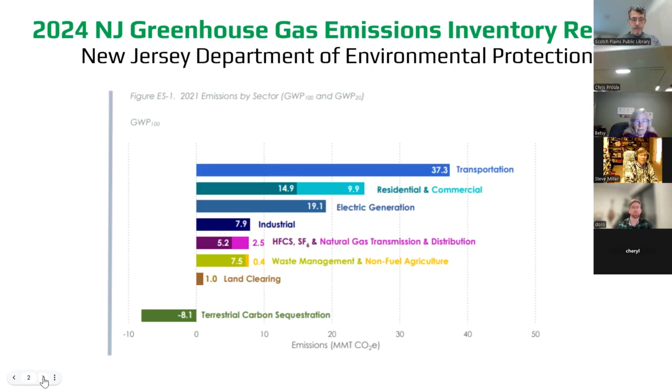Next slide. At any rate, buildings don't change that significantly year by year, and they make up a significant portion of emissions, as you can see. Which is why it's important for us to focus on this.

It's also a complex topic, especially for homeowners or any small business, to figure out what they need to do to reduce emissions. It's also important to work with the contractor out there to bring them up to speed. Contractors will oftentimes do things the way they know because it's business, time, money, etc. But there's new ways coming along all the time, and they need sources of information and references to do this in the most modern way.

So building electrification can really reduce emissions, and the nice thing about electrification is you can also add solar, and then you literally can run your house for really no external source of electricity, I'll put that in quotes because there's different ways to frame that.

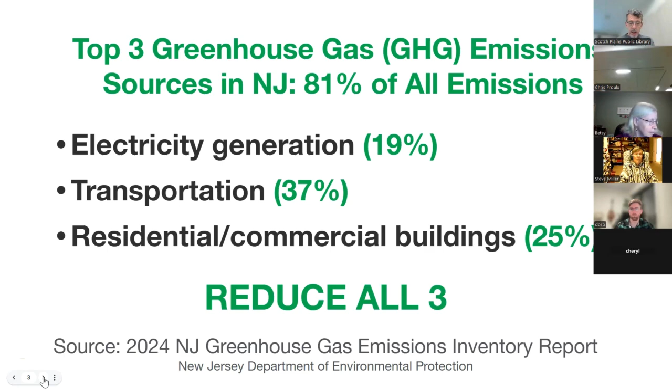But tonight, we'll show you how consumers, as well as the state as a whole, can benefit from having this kind of advice. We have a case study with a person we've worked with recently, Karen, and this will help you understand the process. Okay, next slide, and I think Betsy, you're next.

Is that right? Yep, I'm next. So, hi, I'm Betsy. Just for your information, we do have a Substack site, a website, so that you can get the information. You can sign up for coaching if you'd like, and just contact us after this presentation's over.

So we want to show you what does a coaching session look like, what kinds of things could you expect to do? We try very hard to answer the questions that you have. We don't have a standard procedure. And we want to caution you, without a good plan where you think about things ahead of time, you can't expect good results. Next slide, please.

So even before talking to us individually, a really good thing to do is take a look at Rewiring America's personal electrification planner, and you can see the URL there on the slide. It's a really great online tool, it helps you think through your situation, gives you a lot of information, and then you can go back and forth and fool around with it. Then when you're ready, if you want more personalized questions answered, you can contact us. So the first part is to go to the tool and make a plan. Next slide.

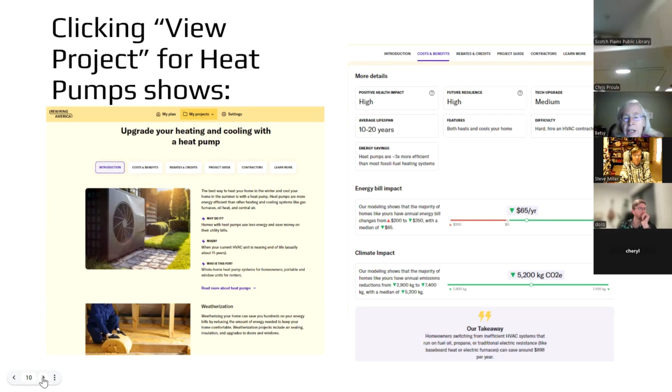Underneath the introduction, on the left-hand side of the page, it tells you what a heat pump means, and then it gives you the cost and benefits on the right-hand side. It's got a high positive health impact, it's going to last 10 to 20 years, and it's fairly hard to do—you really are going to have to hire an HVAC contractor. Then it tells you about your energy bill impact.

Now we're continuing to click along those tabs at the top, and we're at rebates and credits. I want to emphasize that rebates and credits come from 3 different sources: there are federal rebates, state rebates, and utility rebates, although there may be local rebates in some cases too. So there are a lot of different places to look for financing.

Rewiring America knows about the federal rebates, and it tries to keep up with state and utility rebates, but you might have to look for those yourself as well. You can see there's quite a bit of money available, but if you look on the right-hand side, the costs show this is a rather expensive project, as you'd expect if you were replacing your gas furnace. It's also recommended that if you haven't already weatherized your house, you should do that too, and it gives you information about that.

And if you keep clicking along the top of that tab line, we get to the project guide, a set of steps you'd take to actually put a heat pump in your home. You could click on any of those to get information, but for this presentation I clicked on vet your contractor candidates.

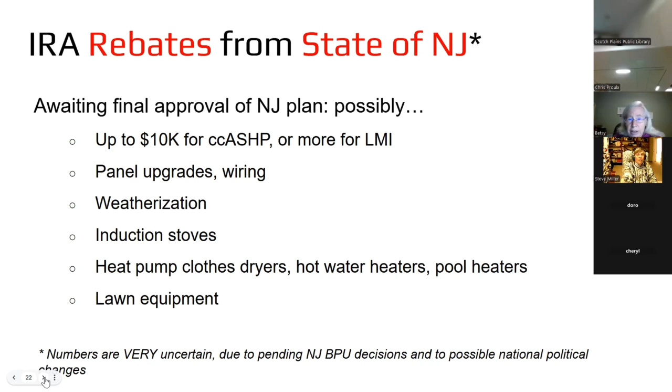We're awaiting the IRA rebates from the state of New Jersey, and here are some notes as to what we think will be proposed and what we think will be law: probably up to $10,000 of a rebate for cold climate air source heat pumps, and possibly more if you're in the low to moderate income bracket. There will also be rebates for panel upgrades and wiring changes, for weatherization, for induction stoves, for heat pump clothes dryers, hot water heaters and pool heaters, and for lawn equipment.

Your utility also offers rebates and loans. One of the nicest things is a zero interest loan. The philosophy is that you can pay for the equipment via the energy savings that you achieve each month, so that's a really nice way to finance things. The utilities also have other kinds of rebates, and they often have sales on equipment like smart thermostats, LEDs, etc.

Another interesting website is EnergyStar.gov, and you can find rebates through there too for particular kinds of equipment. Here's one where I just looked for heat pumps, but you could look for clothes dryers or pool heaters or something.

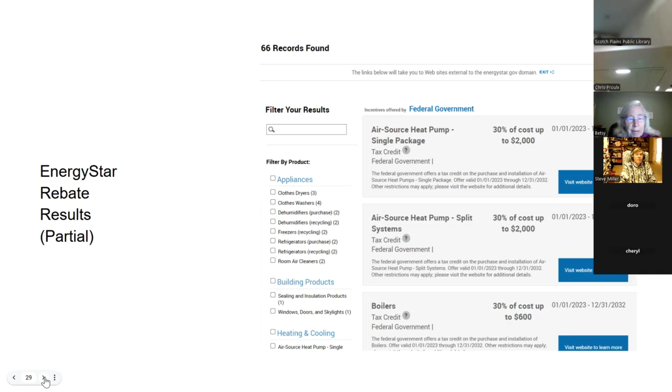Finding an HVAC contractor. We mentioned this a little bit already, I don't want to get too much into it since I talked about most of it. This is where we can help you a lot in trying to find local people.

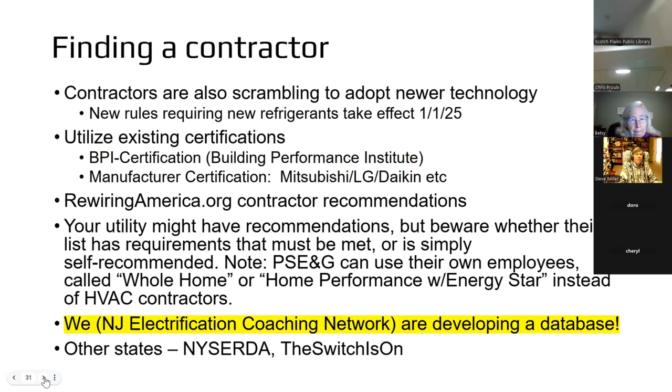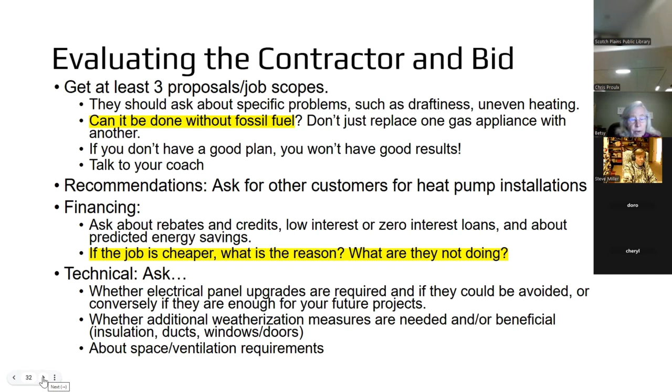Where we can also help you is in evaluating the contractor and the bid. Get at least 3 proposals. Ask them, can you do it without fossil fuel? Many contractors are just proposing what they know, not necessarily the newest technology that's out there. You can also ask your contractors, if their job is cheaper, what are they not doing that other contractors are doing? And then there are definitely technical questions that we can help you with. You'll see some of these later in this presentation.

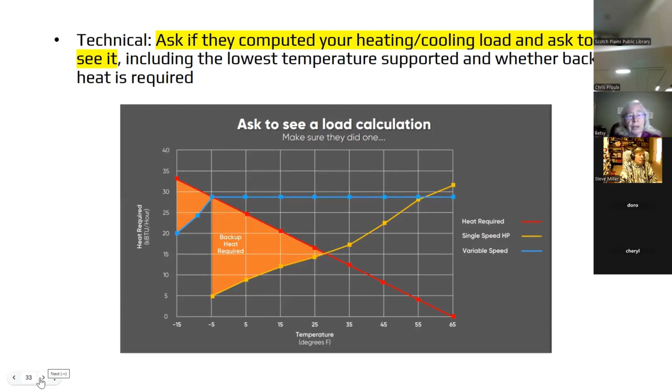Here's another technical question, and I think I'll skip that. This one is very important for determining whether the heat pump selected for your home is going to properly heat your home at all different temperatures.

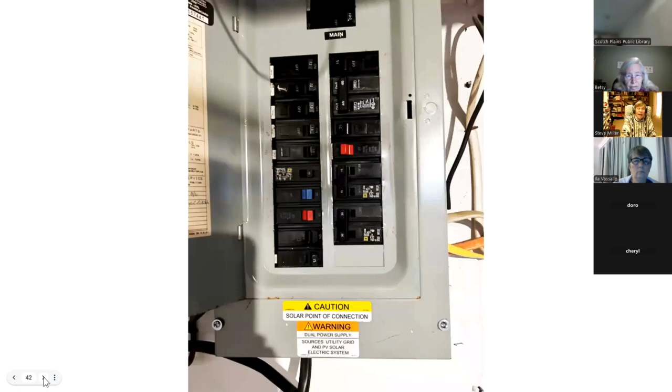So next, let's take a look at appliances inside Karen's house. I start with Karen's electrical panel. This is the weak link of the whole scheme with Karen. The panel is rated only at 100 amps.

You can tell, if you look closely at the main breaker at the top, it's stamped 100. Karen did receive a quote of $3,000 to upgrade the panel, and the federal tax credit would lower the price by only $600, so it's still an expense.

We hope to continue using this panel because experience has shown that careful planning of electrical appliance upgrades allows use of 100 amp panels for up to 3,000 square foot houses, which is like 3 times the size of Karen's.

So a licensed electrician can calculate how electrically full this 100 amp panel actually is. The problem is not those breakers almost completely filling the panel. The problem is more electrical load, where you calculate the simultaneous load using rules by the National Electric Code.

We do have an online spreadsheet that people can use, and I've used it myself to do my own calculations of the electrical load, and other qualified people can do the same.

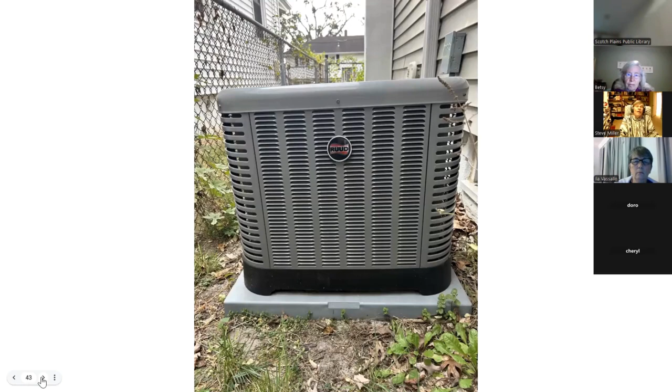But regardless, if we replace this with a heat pump, which tends to have much higher efficiency than the AC, there's a good chance that heat pump could use the same wiring as this AC and just directly plug in place of it. I did that in fact in my own house, and not only did they use the same power, they used the same refrigerant lines, the same copper tubing. So it can be done.

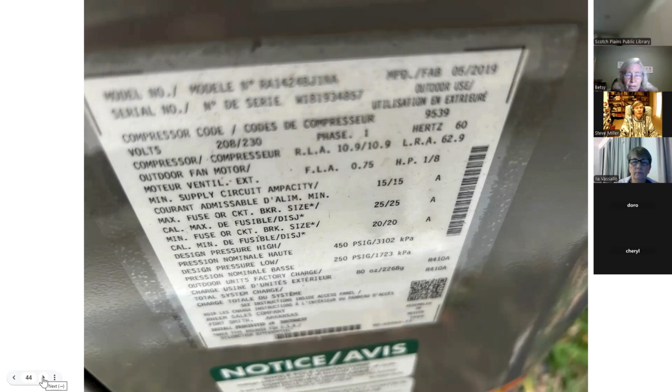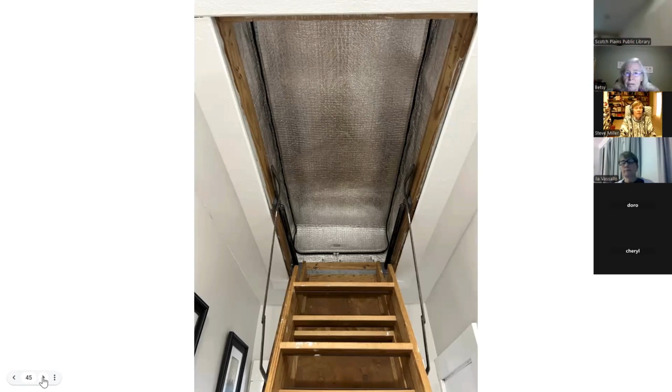One issue I quickly saw here is there's no ventilation of the attic. Karen told me she sometimes opens the windows, one at each end, to cool the attic. A major concern is condensation. I really have not seen an attic without ventilation.

So another recommendation is that Karen use an audit and a weatherization program to look at whether they need to have grates in the ends of the attic to allow airflow.

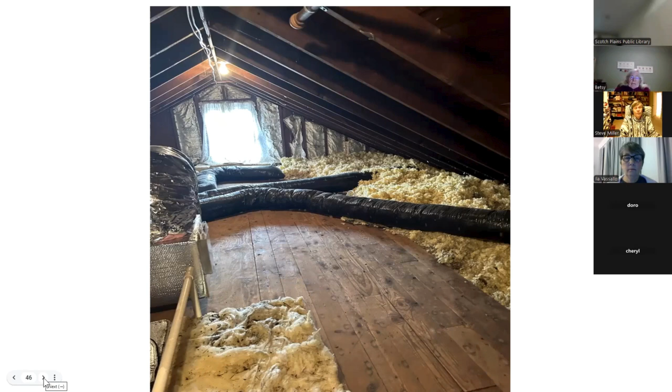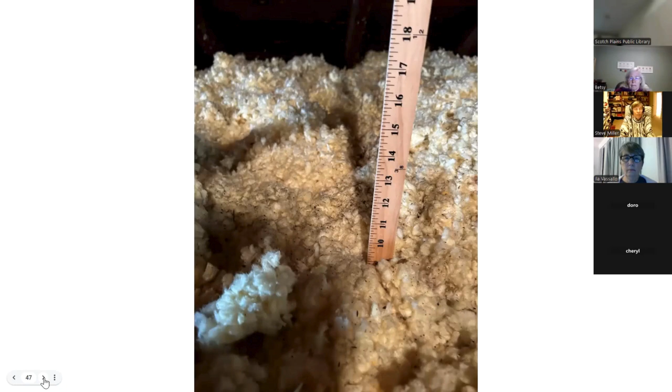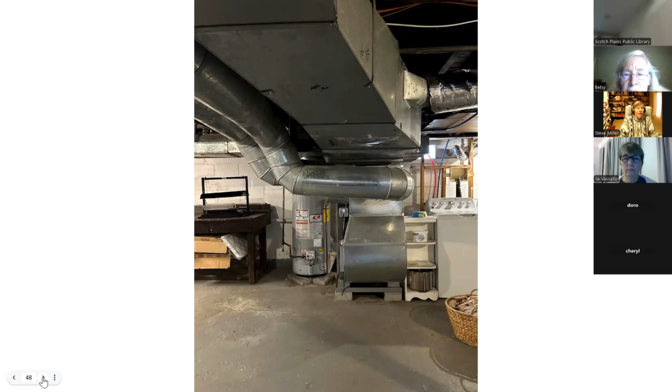One thing that's very tiny, right in the middle of this photo, is a 120 volt AC outlet mounted on the central duct. Next to it is a gas water heater on the left. This outlet could be very convenient because it could be suitable for a shared circuit 120 volt heat pump water heater to replace that gas water heater. We'll talk about that in a second.

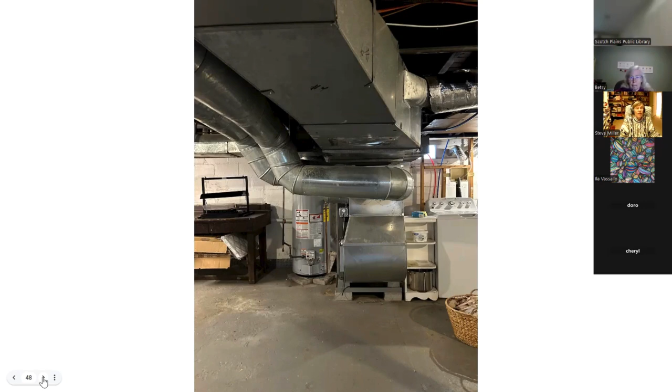Karen told us that the bedroom and another room directly above the ducts get several degrees warmer, too hot. So we suggest an energy audit that might recommend duct insulation, and that might help make the rooms more comfortable directly above these.

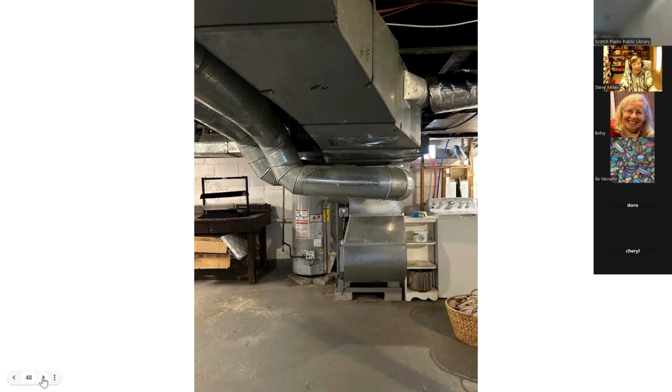Karen's basement ducts made me think of my own house with exposed basement ducts. For my own house, I gathered these supplies from Lowe's and Home Depot and very easily am able to do my own duct insulation in the basement.

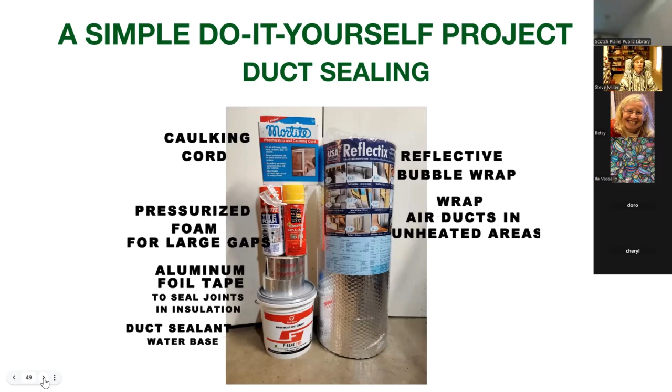I had an outdoor clothesline for years and always used it, but this year my clothes washer broke and we wanted to eliminate the gas dryer. So we bought a combo washer and dryer from Best Buy.

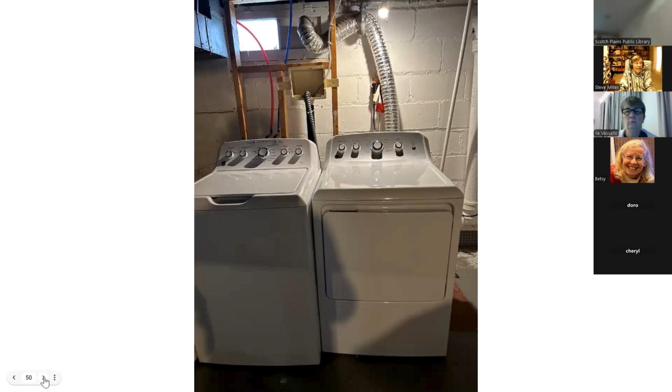We bought it from the local Best Buy. The showroom floor had 3 different manufacturer combo units, sort of like this, and prices and features are similar. So we highly recommend it - you can talk to people like us for experience.

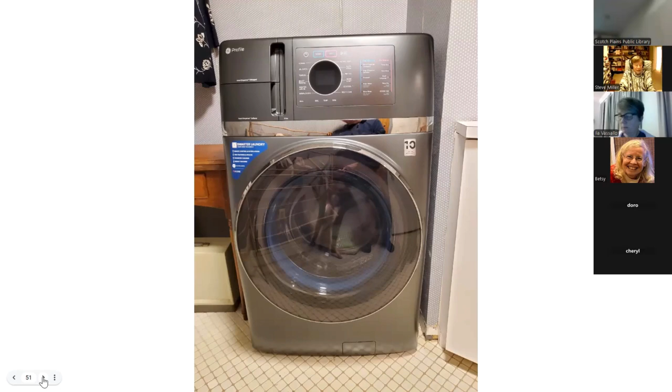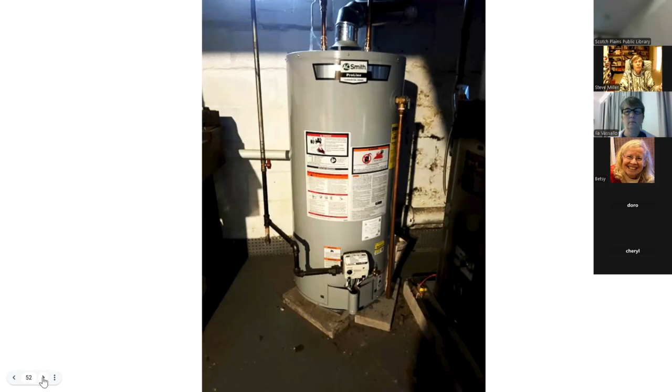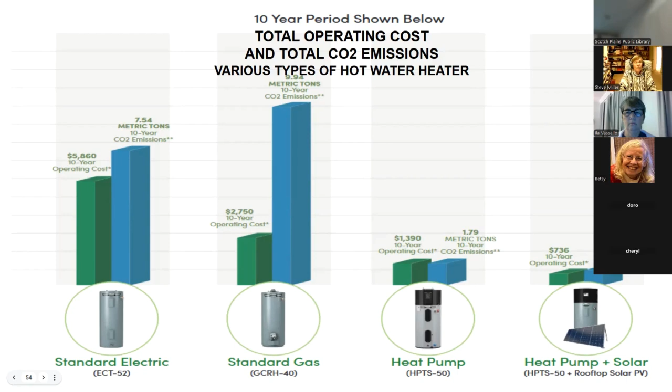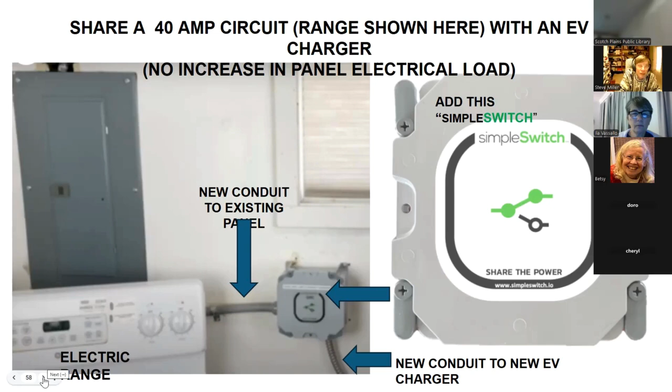I know exactly how this thing would wire up - I studied it a bit. I'm an electrical engineer, so I made sure the electrician she's going to have installs it correctly, and I emailed Karen a schematic she's supposed to give to the electrician. That was supposed to have been done, I think, in December. I haven't checked back with her, but I'm hopeful this arrangement is now working beautifully.

Next. So Karen has bought her Chevy Bolt EV and relied on an EV charging station.

I advised her to buy this type of charger, although there are many available. This is made by Tesla - it's called a universal wall connector for any EV.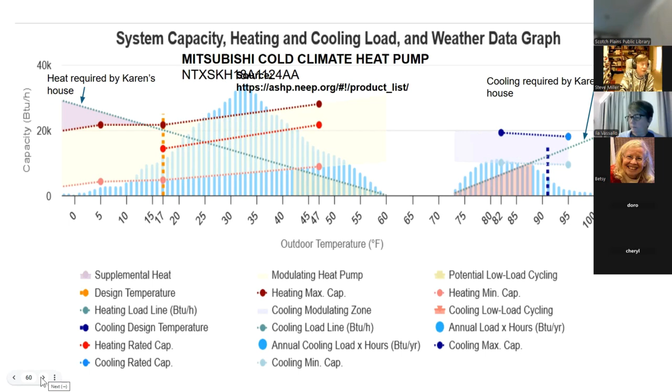You can gauge that by the large amount of red you see on the right side in the cooling. So a contractor who knows what he's doing would go on and select another model that does a better job cooling in the summer. The problem is dehumidification - you need the thing working properly to dehumidify.

That's the sort of thing you have to make sure your contractor knows what to do and actually does that sort of work. The next 3 slides are just background information.

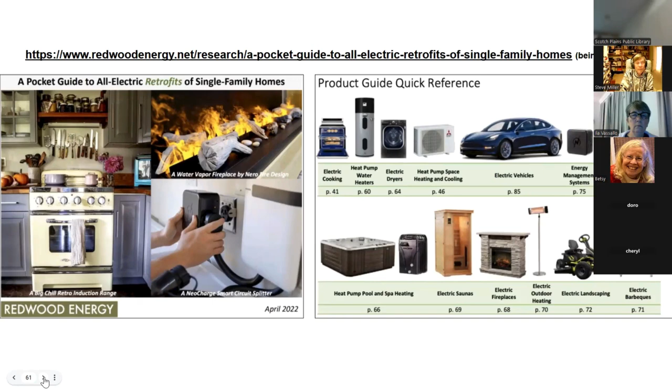I highly recommend you take a look at the Redwood Energy site. It has loads of stuff on any sort of electrification project you can imagine. And there are 2 pages of very useful references. I hope we have a way to get all this information to you.

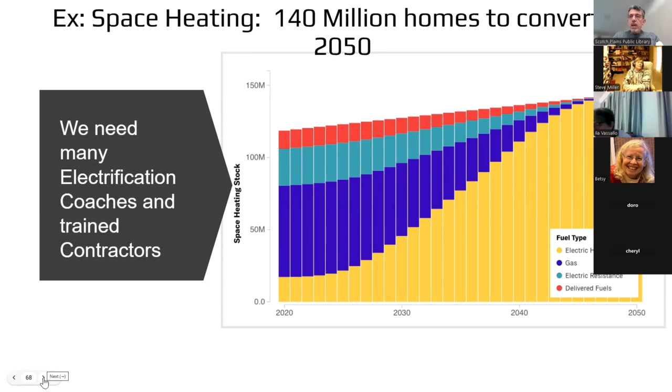So anyone can become an electrification coach. If you're a community leader, if you're just a homeowner, if you're in real estate, or if you're a contractor, any of these can be very helpful to the community. As you do this, it may just be that you learn what to do for your own home, or the homes of your friends, relatives, or children. But before long, you realize that a lot of people need help with these kinds of things. It may not be a complete redo of the home, but just preparing someone for when that furnace or water heater will go sometime in the future, to show them these things are available and it's really not that hard to switch.

So the training is done by Rewiring America online, and it's a 4-week class. There's about one main class per week, and then some side meetings with experts where you can learn about more specific topics. It has a wide range of people - a lot of retirees, a lot of contractors, a lot of people who have some basic knowledge through their work as well.

So we need volunteers. If you'd like to become an electrification coach, you can speak to us. There's a URL in the slide deck to fill out an intake form. The intake form is a great way to tell us what you're interested in doing, and then we can help you on a one-on-one basis. The other area you can go to, as you saw on the presentation, is the personal electrification plan. That's just a way to help you think through what you need to do and what order to do it in.